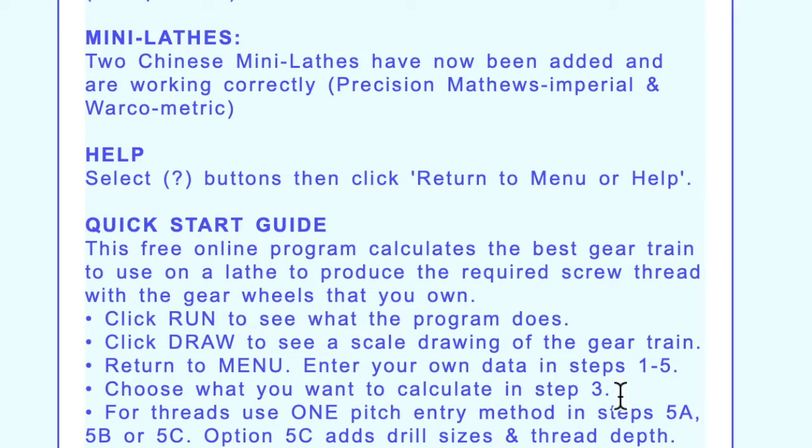We don't need to worry about much of what's on here, but we've got Contact Us, so if you ever need to contact me about anything, I'm right there. We've got a quick introduction here which includes a quick start guide, but let's scroll right on down to the menu itself—this is the main center point for the program.

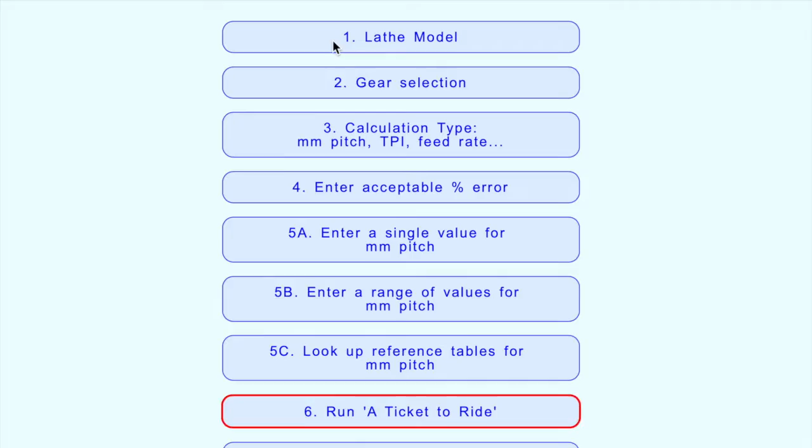We keep coming back to this point, and there's a series of steps you go through to enter the data first, and finally you get to step 6 down here and run the program. So the first thing you enter is the type of lathe you have, and we'll go through that, then you enter the gears that go with that lathe.

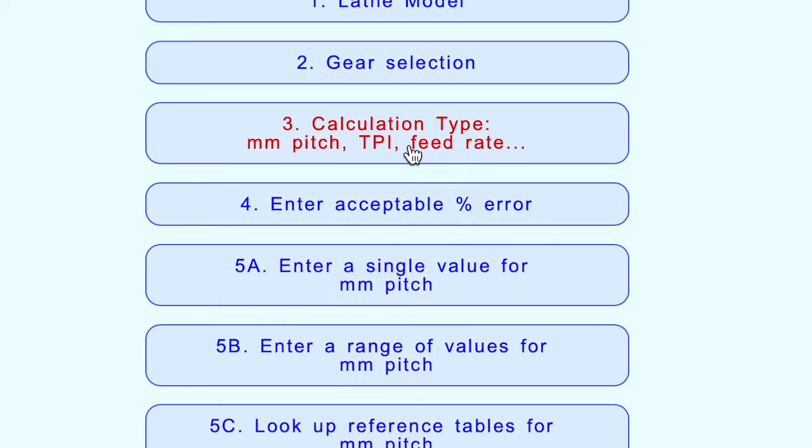That's all we're going to do in this tutorial. Then we'll have a second part where you go on and enter the type of calculation you want, whether you want a thread with millimeters pitch, threads per inch, calculated feed rate, or something like that. There's actually 8 different options on that list.

Then we come to enter the acceptable error—that's what we were just talking about, the error you're willing to accept. The next 3 steps, you only choose one of these 3, and it's really just one step, step 5. The first one is very straightforward: you just put in the pitch of the thread you want, and then you go straight to run.

An alternative is to request a range of threads and click run, and the third option is to look up a reference table to find out what pitch your thread has, and then go to run. So that's how the thing is basically structured.

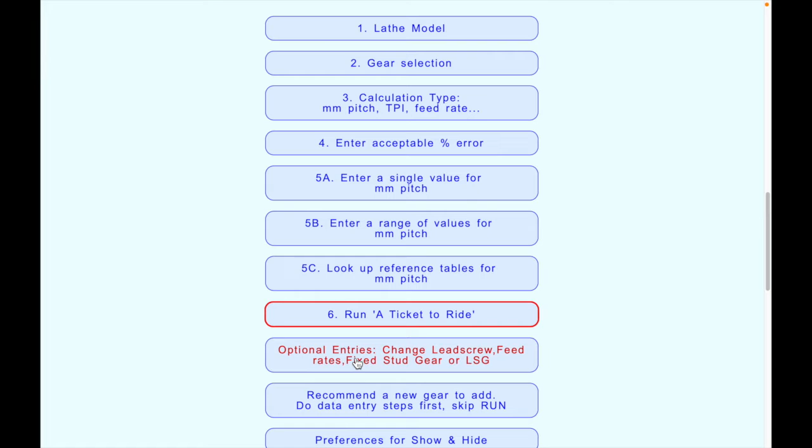We're going to be talking about mini-lathes, and they require some entries on this list here, and perhaps I should go through that during this episode to explain what special entries are required for the mini-lathe.

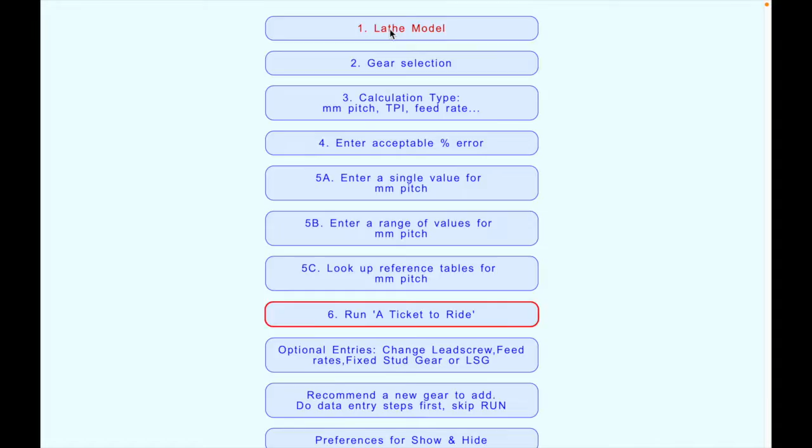So we'll start with entering the lathe model in step 1. Choose a lathe - we've got a long string, there's actually about 20 different lathes on here. But if you've got a lathe that has no gearbox, you might want to choose either an imperial or metric one with no gearbox, and we should be able to do any lathe of those types with no gearbox. But we're going to be talking specifically about mini lathes, and this is a particular mini lathe which does not have a gearbox. It's a Warco brand, a UK importer of a Chinese lathe, so we'll just select that.

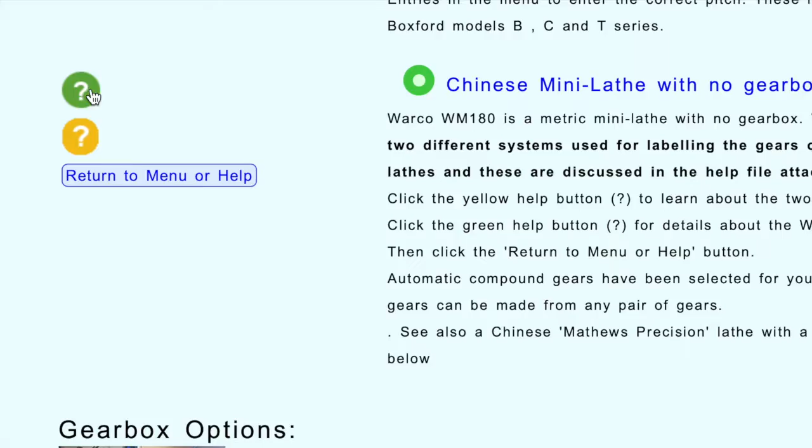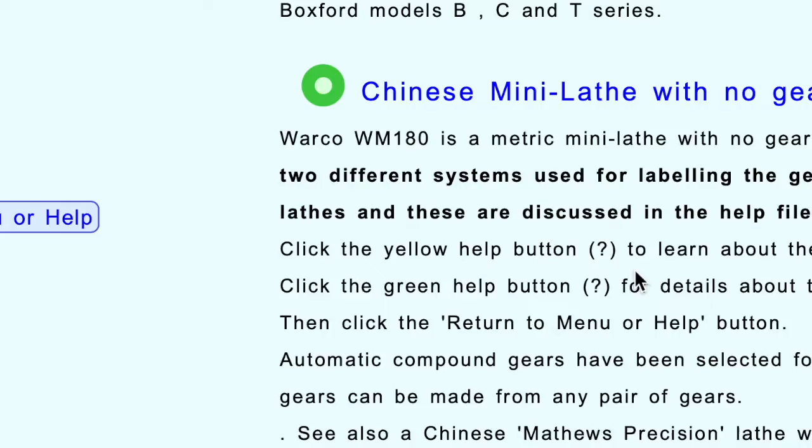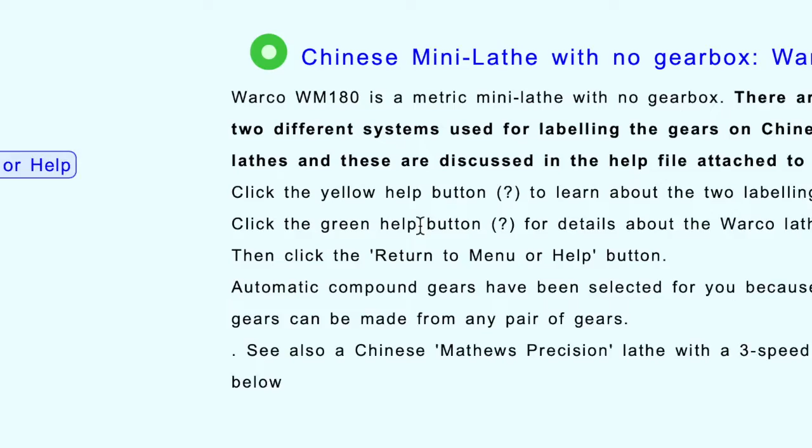And if we want to know more information about any step we go through, we can go to the help file over here on the left. Each entry has its own help paragraph in the help file, and we can go straight to it with this. This one actually has two different topics we can go to, and it says down here what the yellow one is for - it's to learn about the peculiar labeling systems that these lathes have on their gear trains. The other green one is the standard help file about that particular brand of lathe. Let's just click that to show you how the help works.

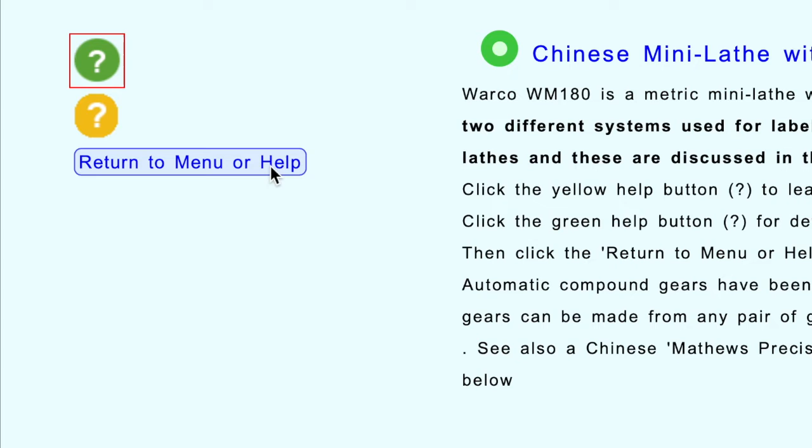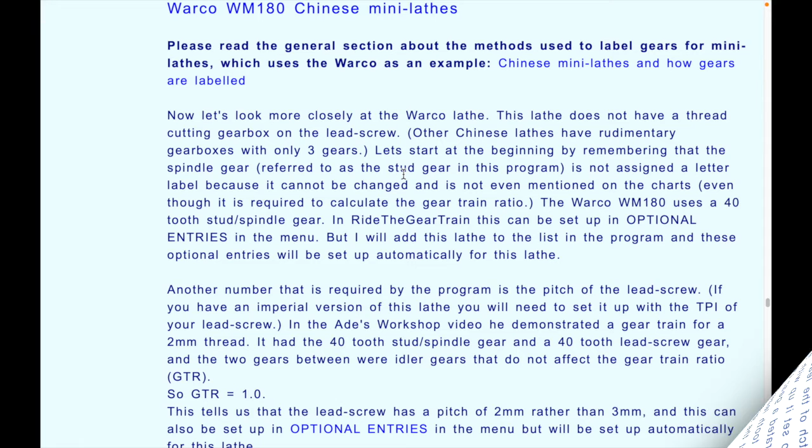Clicking it, nothing happens except a little red box appears. We also have to press return to menu or help, and that actually takes you to the help screen. When you get there, it's asking you to click again to go to the particular section you requested. So we had apparently requested to learn more about Warco mini lathes, metric version. The reason we have these 3 steps to go through is because when you go back to your program, it takes you back to the same point where you were entering data, and the data you enter is still there - so you haven't lost anything by going to the help file, and that's why we have to go through these 3 steps. So click that, and here we go, a paragraph about this particular type of lathe.

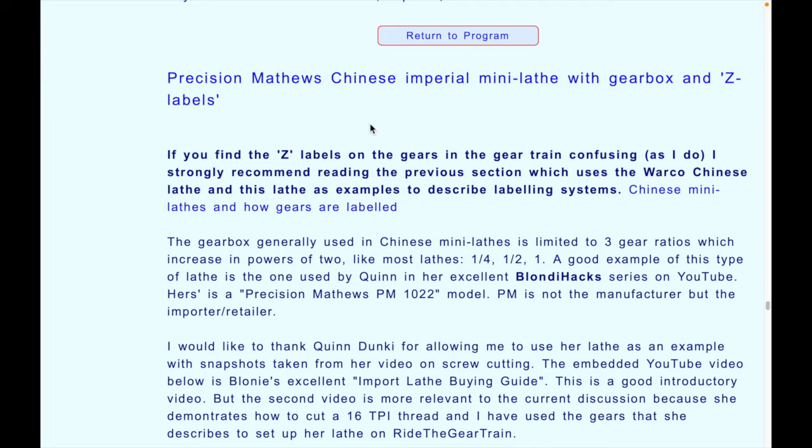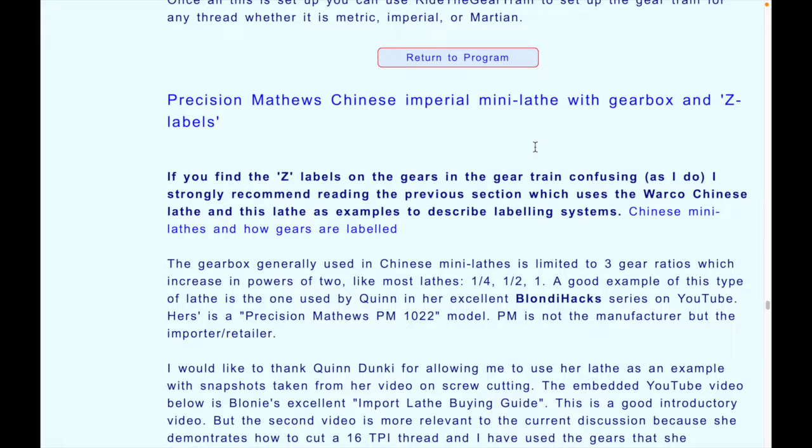I stress it is actually fairly important to look at this, I think, because of this lathe being somewhat different to other lathes. There's another mini lathe on here which we'll come to later, the Precision Mathews Chinese imperial mini lathe, and this one has a gearbox, and it also uses the peculiar Z labeling on the gear train. So we'll probably come back to that one later.

But in the meantime we've just read about feed rates and everything on the Warco lathe, and when we're finished we click return to program, and you'll see we're back exactly where we left off, so we haven't lost anything, and it's even selected our Chinese mini lathe with no gearbox.

Okay, once we've selected that, we can return to the menu again, and you don't have to scroll all the way to the bottom. We've got a return button on every line, and we're ready to enter some gears.

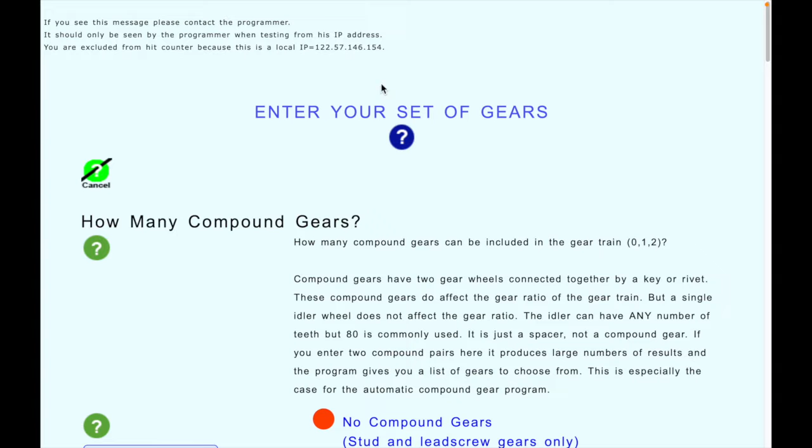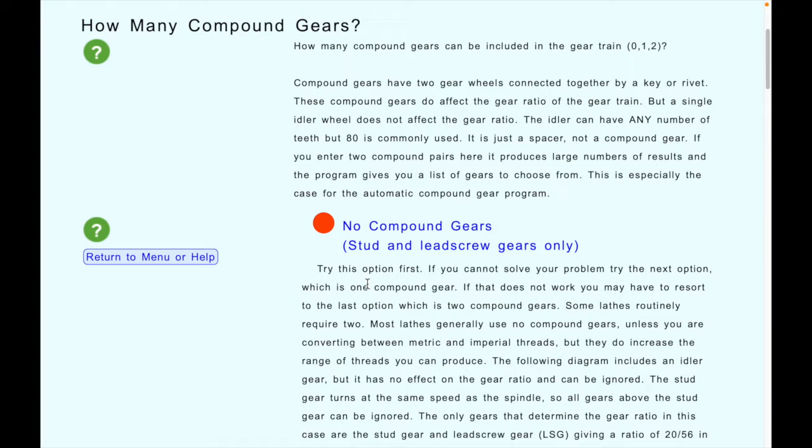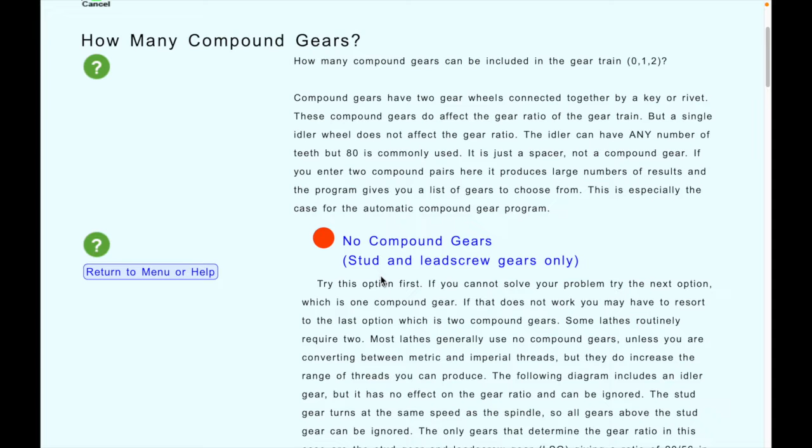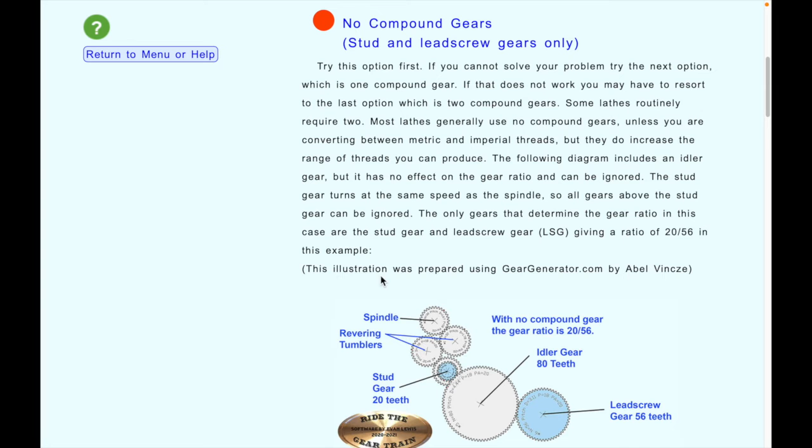It wants to know how many compound gears we're going to use. Now this particular type of lathe, you can't vary the stud gear, which on most conventional lathes you have at the top and can change - we'll talk about that some more later. But because this particular type of lathe doesn't have a changeable stud gear, and this one doesn't even have a gearbox either, we need to get quite a wide range of different gears from the gear train. And if we chose no compound gears, it really wouldn't give us enough selection. We need at least one compound gear in the train, and actually the standard gear trains shown on the tables for these lathes often just use one compound pair.

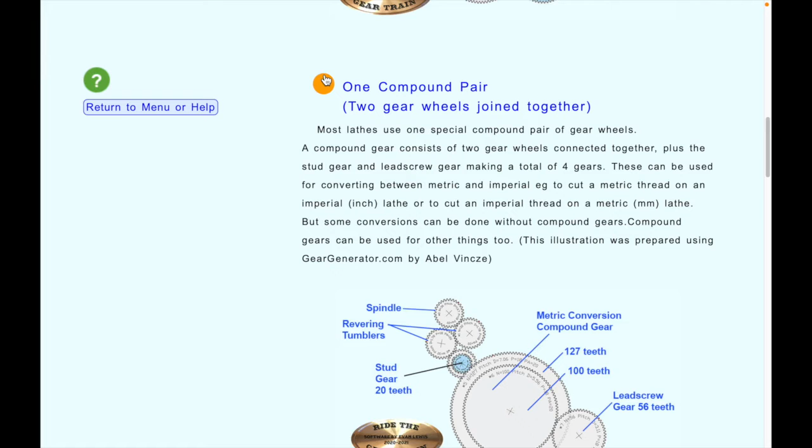I think I'll do that first because it's less complicated, but you can actually choose 2 compound gears, which gives you an even wider range of possible solutions. Or let's look at all 3 of these diagrams showing the gear trains.

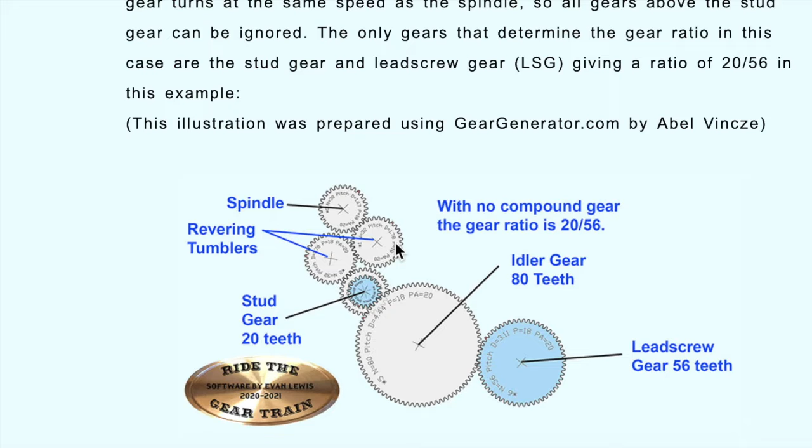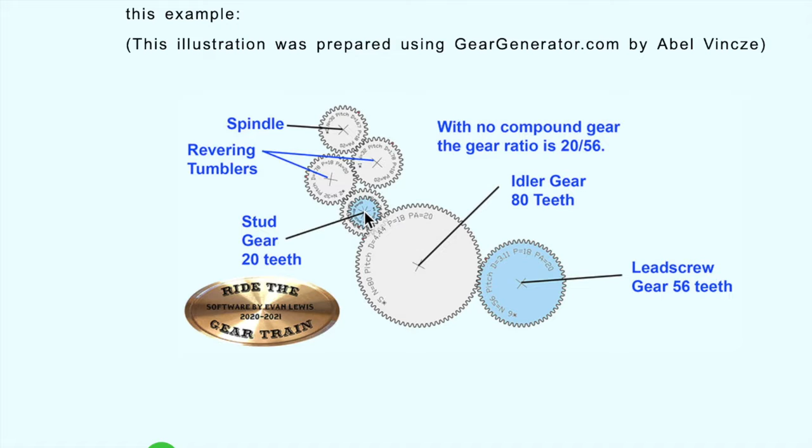This little cluster of 4 gears at the top - they don't actually affect the gear train ratio at all. They're just there to allow you to go into forward and reverse on these British type lathes. But the Chinese lathe doesn't have all that. It only has this one gear here, the blue one, and whereas that gear can be changed on British lathes, the Chinese lathe you can't change it. The simplest setup is to have an idler gear, which then just drives the lead screw gear. Now the idler gear, you'll need to remember, does nothing in terms of the gear train gear ratio.

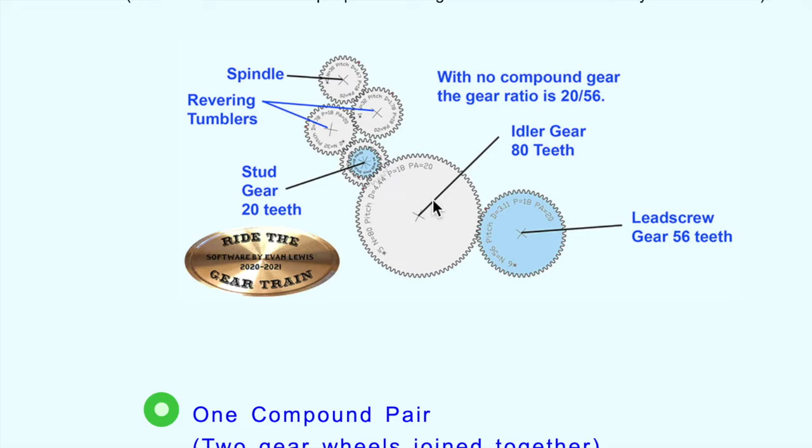The only thing it does is reverse the direction of rotation, and these lathes always have some kind of reversing mechanism on them anyway, so you can switch it over. As I say, this doesn't affect the gear train ratio, so it's just like having a 20-tooth gear driving a 56-tooth gear. And if you can't change that 20-tooth gear, that only leaves the lead screw gear that you can change, and it doesn't give you a very wide range of selection.

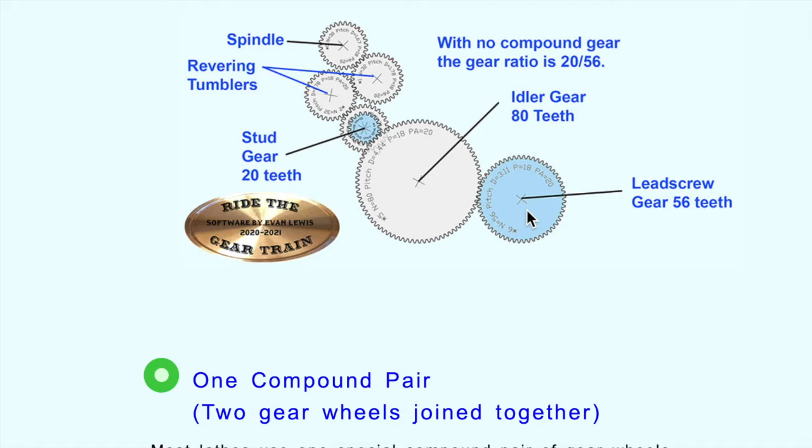So it's more usual to go to a system where you have at least one compound gear in the middle, and that'll give you most of the solutions you want.

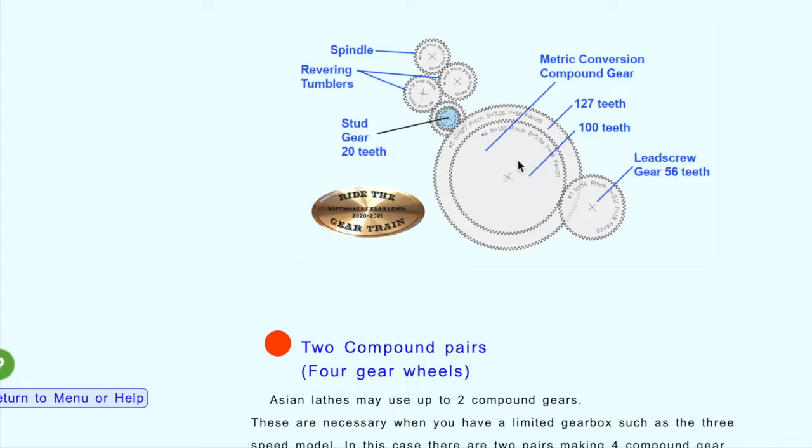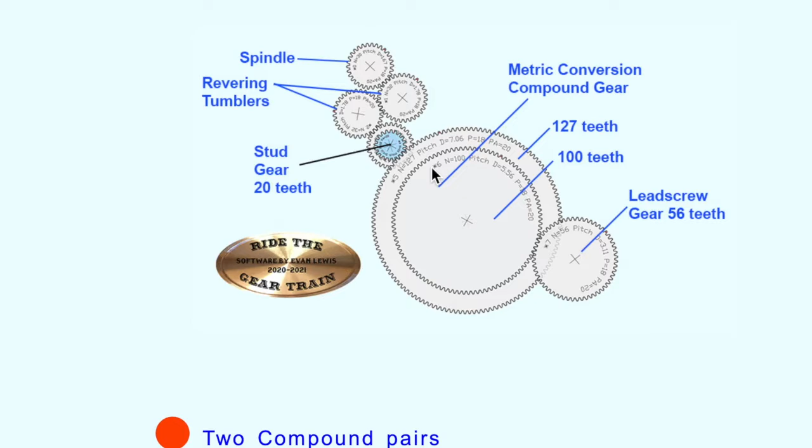So in this diagram we have two gears that are joined together on a key, so they turn around together. Sometimes they're actually riveted together, but not on the Chinese lathes, because on the Chinese lathes you can use any of the gears you're provided, put them together in any way you like, and mix and match. I call it mixing and matching, where you use any gear in any position along the gear train. You're not restricted like you are on some of the British lathes.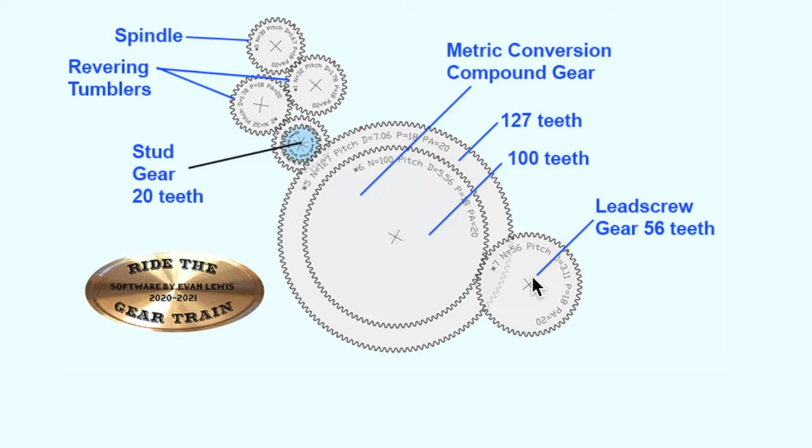So in this case we have the stud gear, which again cannot be changed. It's set on 20 teeth in this case, and it's driving, at this point here, the 127 tooth compound gear, which is physically connected to another gear which has 100 teeth, and the 100 tooth gear is connected here to the lead screw and causing it to turn around. So we have now 1, 2, 3 gears that can be changed to produce a wide range of threads. And so that's what we're specifying here when we click one of these buttons, 1 or 2 compound gears.

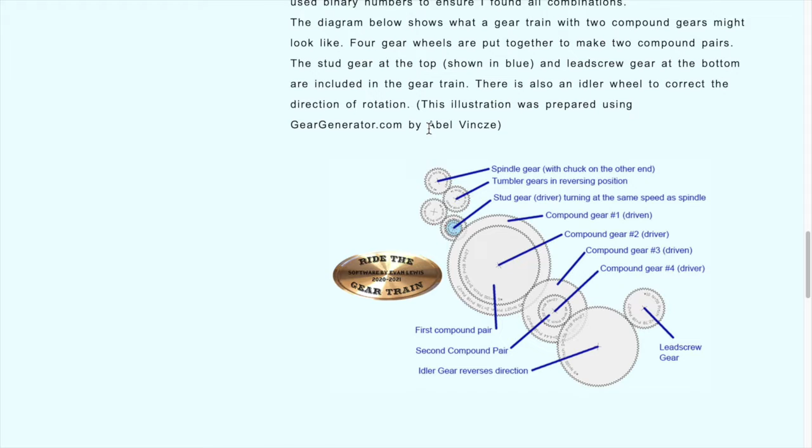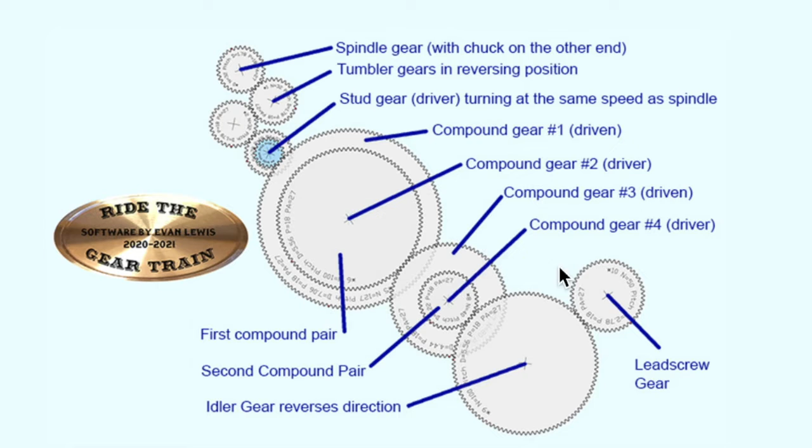This is the version with 2 compound gears. Same kind of setup, except that you've got one pair of gears here driving another pair of gears, which then drives an idler, which does nothing, and then through to the lead screw gear. So it looks quite complicated, but on the Chinese lathes you don't have this cluster of 4 gears at the top, and you just have these 2 compound gears connected together as pairs, and they have keys that connect them together, so they turn together. So this pair turns together, and that pair's another set, and it turns on its own shaft. And this gear is just in here to make it easier to connect this gear to that gear, so otherwise it wouldn't be necessary.

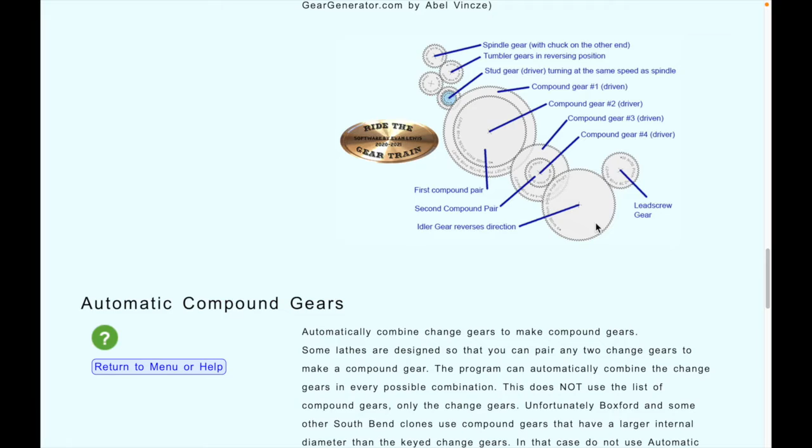So that's 2 compound gears, and we decided we'd choose 1 compound gear. Let's make sure I did that. 1 compound gear, checked. It's green. Green means it's selected, with a little dot in the middle for those who are colorblind.

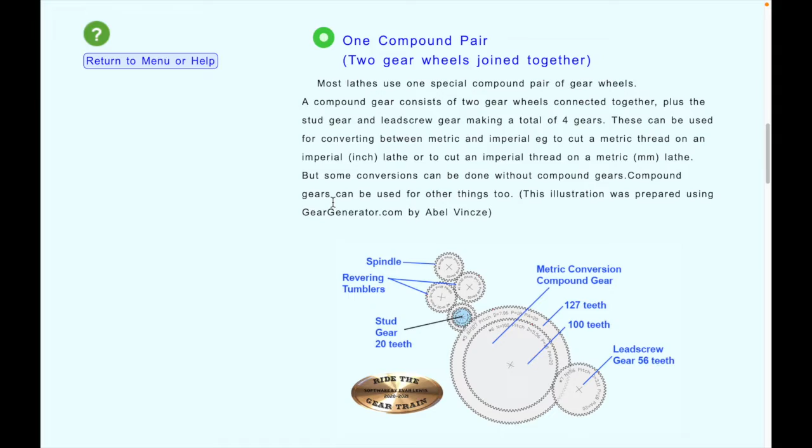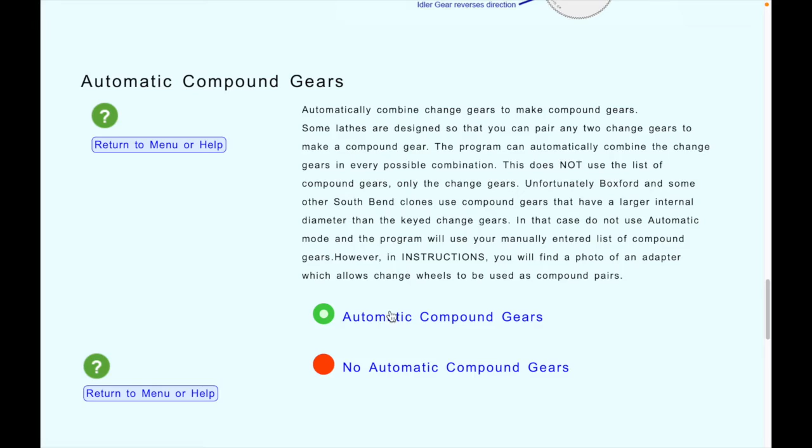As I was saying, in Chinese lathes you can use any gear in any position, so they can be mixed together in any way you like. And if you choose automatic compound, which is normally what we do, it automatically goes through and works out all the different ways you can put those gears together. It's only certain British lathes and American lathes that can't do that, and you have to use a manual system. Finally, you can enter your own list of gears.

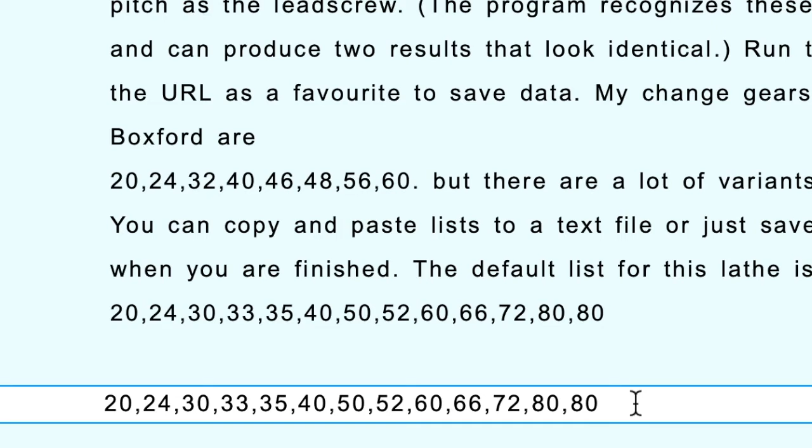And because the mini-lathes don't have a very good gearbox, they tend to give you quite a long list of gears. And these can be put together in any way along the gear train. Have a look at this list and check that it's the same as what you've got. It may not be, so you can edit this list. You can say, oh, I don't have a 24 tooth gear, so you can just take it out. And so that's gone from the list, and it won't try to use 24.

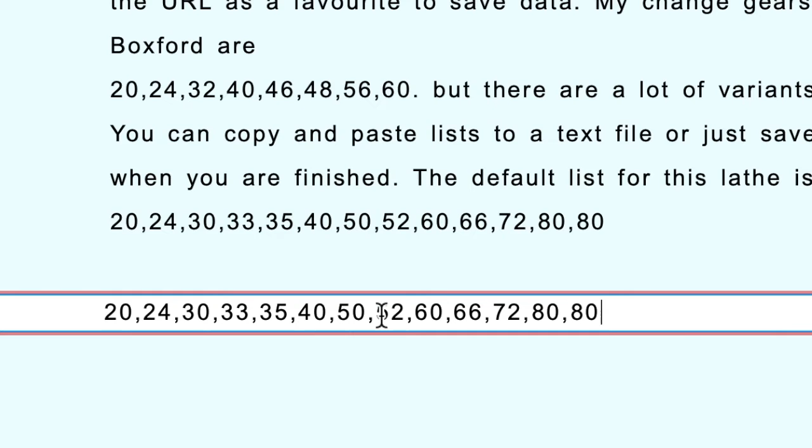If you've got a completely different list, you can just erase the whole lot and type in your own list, or you can delete that and just get one of the standard lists from here, copy and paste. And since you can do that, you can also set up your own file if you want to, just to keep a record of your list of gears. You can put that in a text file and just bring it in whenever you want.

However, that's not really necessary, because this list is actually recorded in the URL for the program. Actually all of the data that we enter here is stored in the URL. It has 100 variables in there, and if you save the web address, the URL, it'll save all your data as well. So if you use that as a favorite or bookmark and click on it next time and come back to the program, you'll find that all your data is there again, because you used this particular personal URL.

There's a list of compound gears, but because we're using automatic mode to make up our compound gears, we don't need to use that. With the Chinese mini-lathes, you do not use a separate list of compound gears, and it's just left empty here. If there's anything written in there, it doesn't matter, it won't get used.

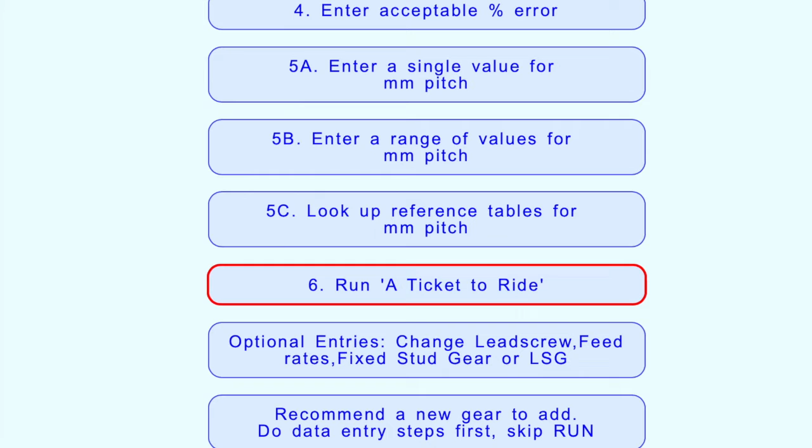We've done that. We can now return to the menu, and there's another item we need to look at specific to the Chinese lathe, and that is optional entries. This is already set up for you. If you chose a mini-lathe to begin with, this will have been inserted into the data within the program, so everything should be okay here.

The first item just specifies how many results you're prepared to look at. Do you want to look at the 2,000 different options? You could actually reduce that if you wish. The program will stop after that limit.

Some lathes have power feed on the carriage and others have it on the cross slide as well. If you're using the lead screw to drive the carriage along, then there's no special gear ratio here, and this is just set to 1. But some lathes do have a gear in the carriage which slows down its movement when you're using power feed, so that you get a nice fine cut. Most more sophisticated lathes do have a gear in there, and often this ratio, instead of being 1, will be 0.3. I've assumed that the basic mini lathe doesn't have that feature and simply uses the lead screw to drive the carriage along, and in that case the ratio is just 1.

The other ratio here, if you look at the icon, it's got an arrow going across the cross slide, so that's for power feed going across the lathe on the cross slide, and it's also set to 1, but it could be a different ratio.

Now this is something about the Chinese mini lathes. This shows the stud gear that cannot be changed. Remember, the previous diagram we looked at had a cluster of 4 gears in here. They are no longer present because we're looking at the Chinese lathe, which has just 1 gear. The problem is that this gear is actually machined into the end of the spindle shaft. On the other end of the spindle shaft we have the chuck. On this end at the back of the gear train, the shaft comes through here and it's got these teeth machined onto it, so that's why they can't be changed.

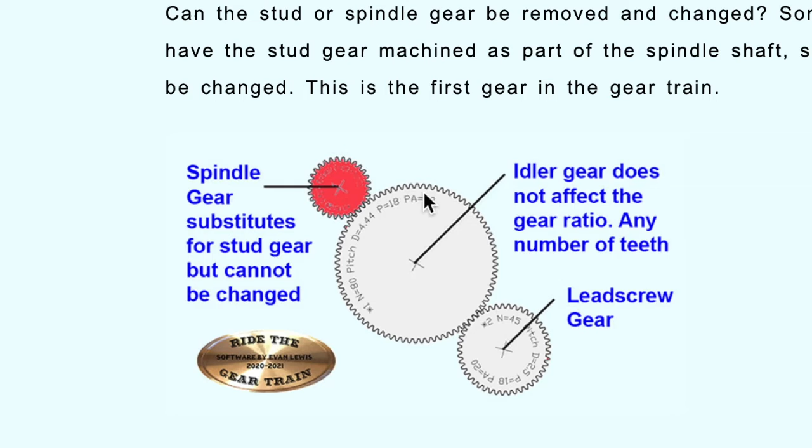So that can drive a single gear, as we looked at previously, which drives the lead screw. We just have to tell the computer program that that gear cannot be changed. It is shown in red here for that reason, and we have answered no here. No, it cannot be changed. You can go back and change these settings, but that's appropriate for your Chinese mini lathe.

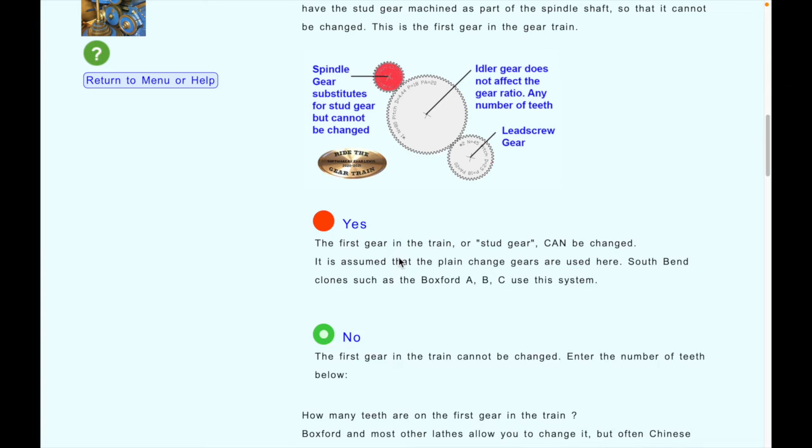Now we have to actually tell it, well, how many teeth does that gear have? We're not going to change it, so let's put in now that it has 40 teeth. I have seen others that have maybe 55 teeth, especially if they have a very large hole through the center of the spindle.

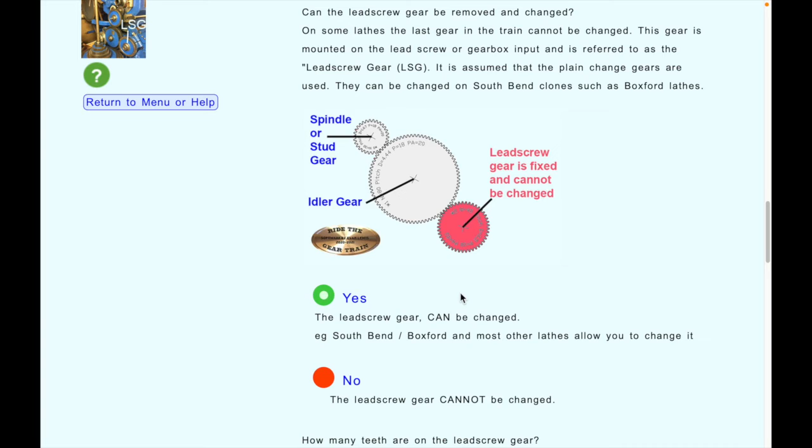There are some lathes, and not necessarily Chinese ones, where the lead screw gear can't be changed. On the other end of the gear is either the lead screw itself or the lead screw gearbox. Because it's incorporated in the gearbox, sometimes it cannot be changed. However, on the Chinese mini lathes, they generally can be changed. So I said yes, it can be changed here. So although we've got a box here with a number in it, it doesn't need to use that because we can vary it.

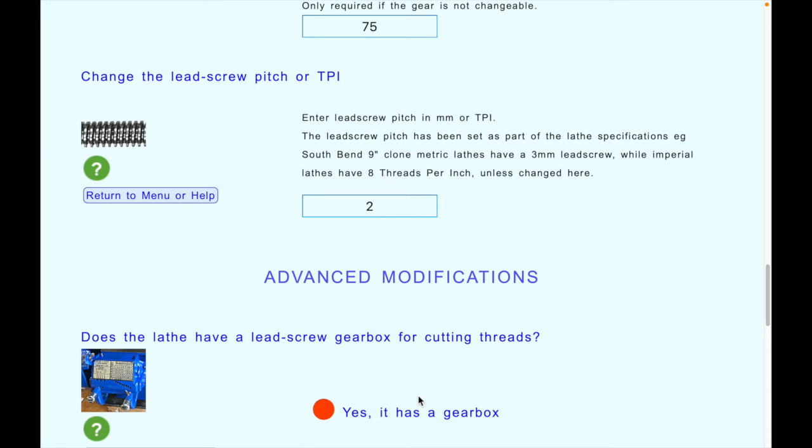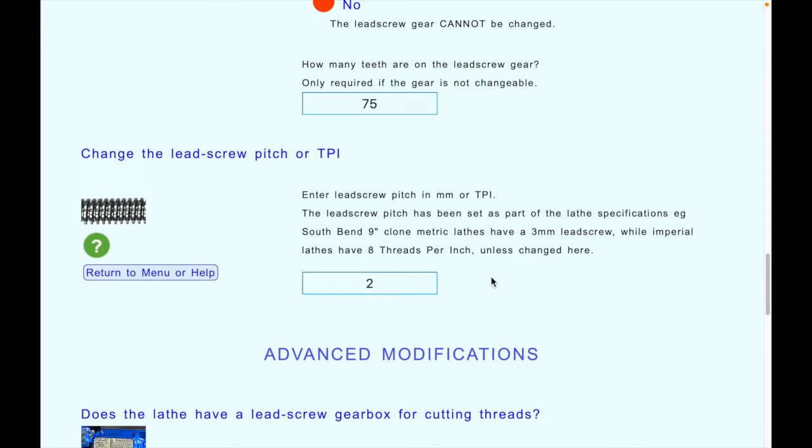This is something you might need to know about, because the Chinese mini lathes usually have a 1.5 millimeter pitch on the lead screw, and some have 2 millimeters pitch. If you're using an imperial lathe, it'll be different again - it may be 16 threads per inch. This should be set up for your particular lathe, but if your lathe is different, and especially if you seem to be getting some strange results, you may need to come to this section called optional entries and check that the pitch of the lead screw has been set correctly for your lathe.

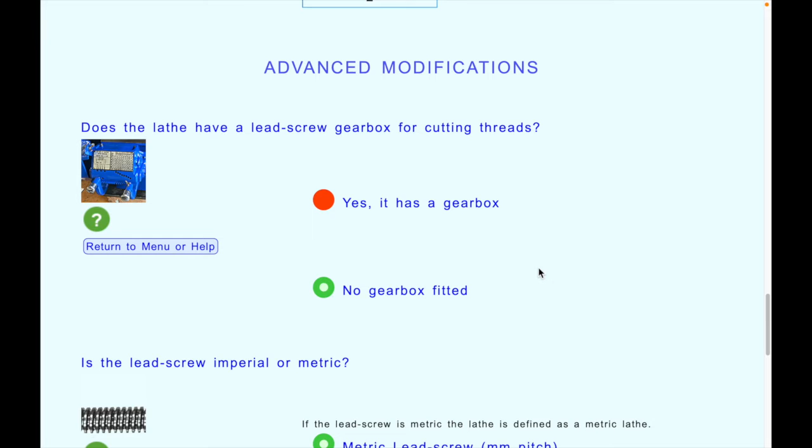Beyond that, there are some advanced modifications which you won't need to get into. This is used by people who have some peculiar lathe which is not mentioned on our menu, and they want to get an existing lathe and do some minor modifications to it, but I don't think we need to get into that.

We haven't looked at a Chinese lathe with a gearbox, so let's go and have a look at our lathe selection again.

Last time we chose this one, the Chinese mini lathe with no gearbox, made by Warco.

Below that, in the gearbox section, we have another Chinese lathe, this one here, mini lathe by Precision Matthews. That's the lathe used by Quinn Dunki in her BlondiHacks series, and if you haven't seen her videos, it's well worth watching them. She kindly gave me permission to take some snapshots from her videos to show here. So we'll select that, and perhaps we'll also have a quick look at the help file there.

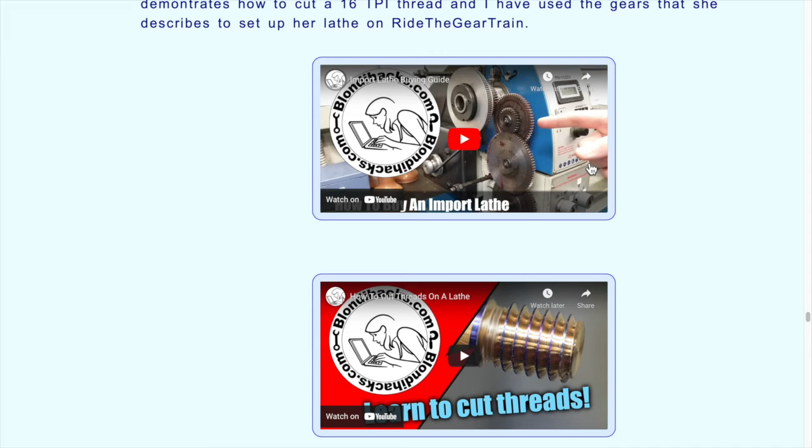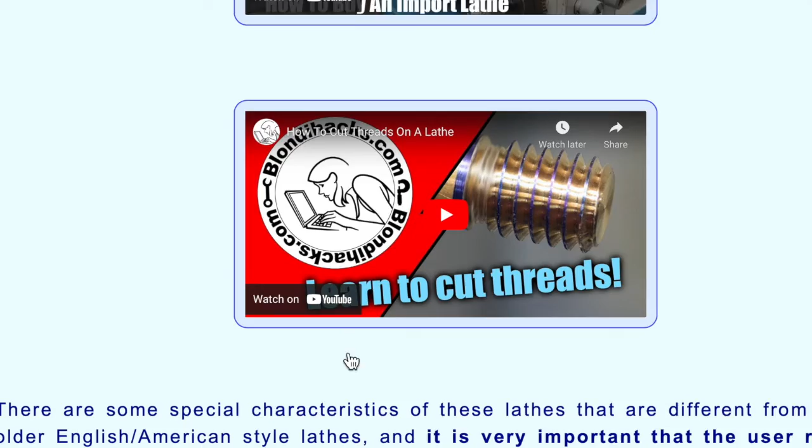There's quite a lot to read. Here are the links to her videos. This is about buying an imported lathe - very good production. And another one that's excellent to watch is how to cut a thread on a lathe. So if you haven't had any experience doing that, it would be well worth watching.

I also have my own video about cutting threads as well. My lathe has a variable speed motor, which I think a lot of Chinese mini lathes have too, and that's very handy for slowing down as you approach the end of the thread.

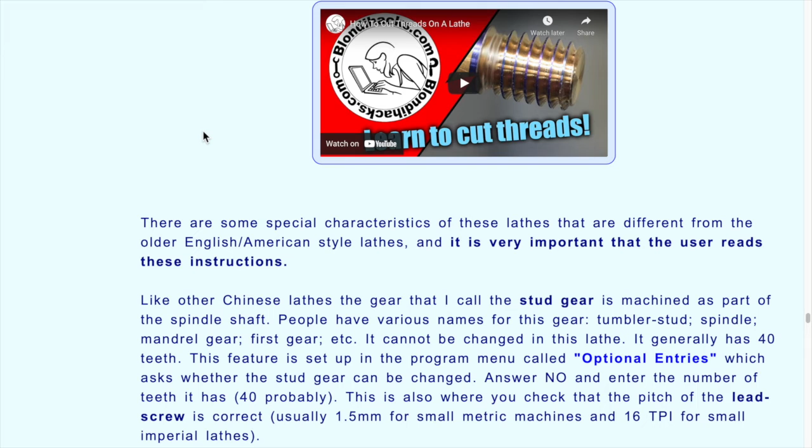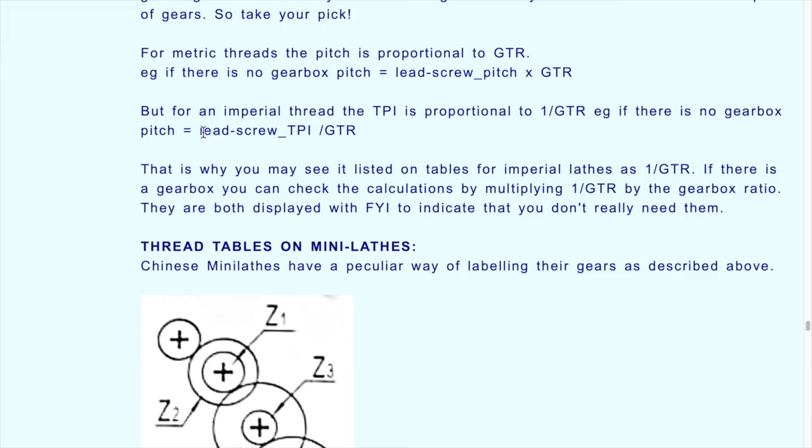The main reason that I stress the importance of reading through these instructions is that the labeling system for these lathes is rather peculiar, and I think this is the system that's used on most of these imported lathes. They label the gears Z1, Z2, Z3, Z4 and L, and at first glance it looks fine, but it turns out that they don't label them in the order that power is transmitted through the gear train, so there's no correlation with gear ratios with this numbering system.

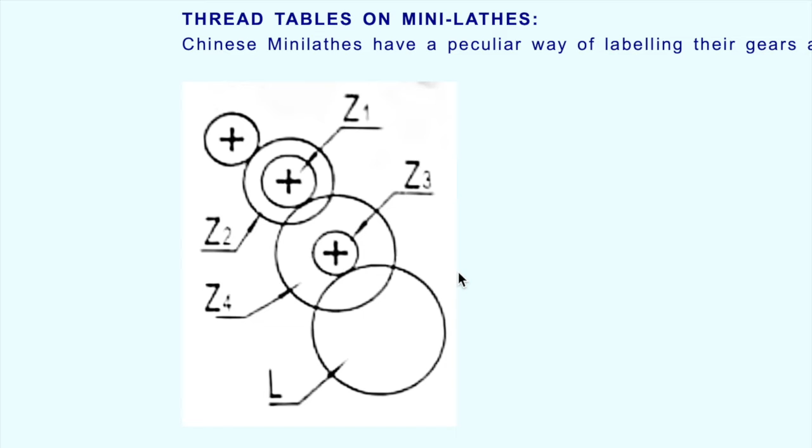They're actually labeled according to the way you put them on the little stud shafts, and these can vary in their order of rotation. So I think it's best just to skip and forget about this labeling system when using my computer program. When using the program, it labels the gears as compound gear 1 and compound gear 2, and this pair is 3 and 4, and this is the lead screw gear. As we said previously, this gear is fixed and cannot be changed, but is usually 40.

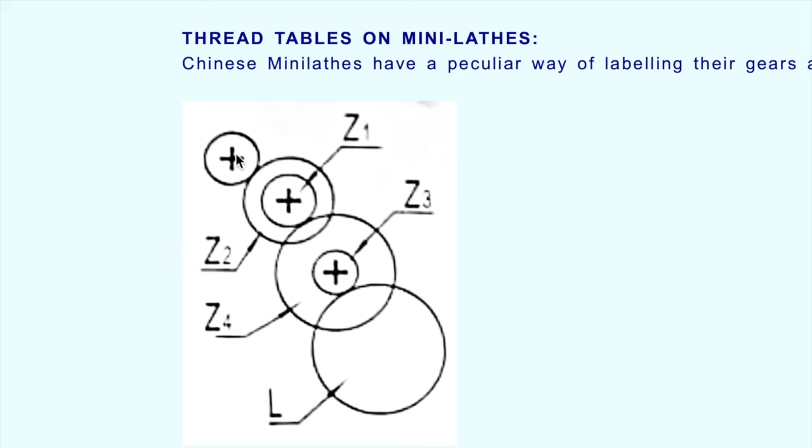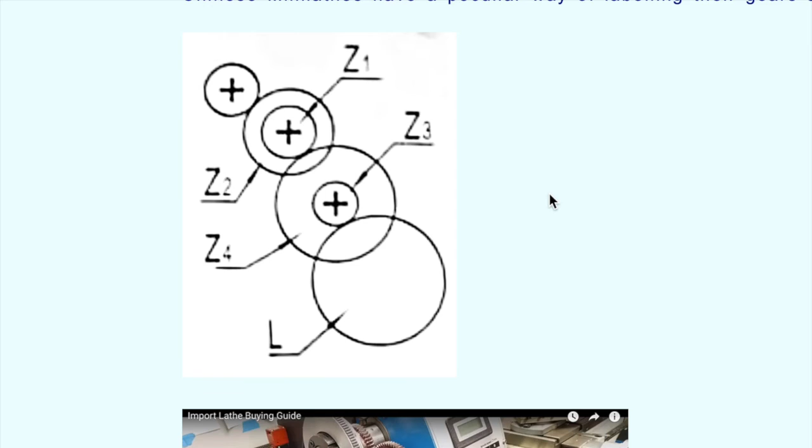So I talk here quite a lot about this complicated labeling system that is used, but I would recommend actually just forgetting about all that and just using the labeling system that I use in the program, because we're not going to be using the specific tables that they use on the front of the lathe.

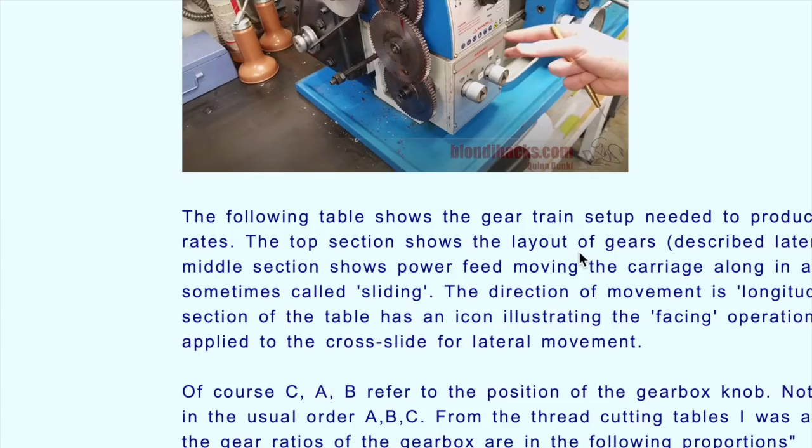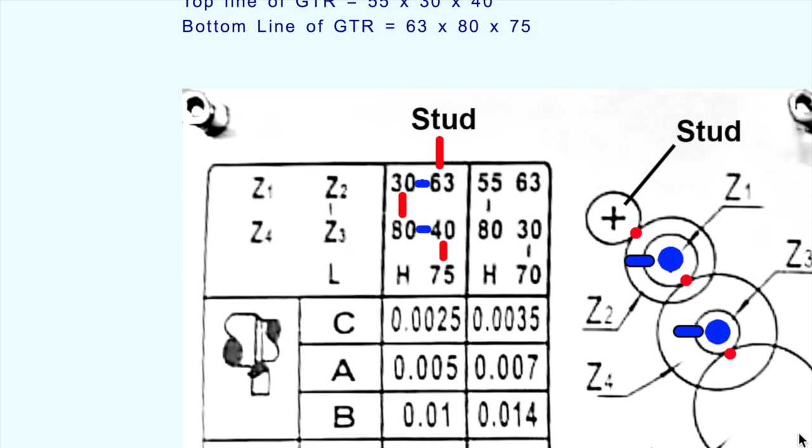So that's how their system works, but we'll just call these compound 1, 2 and 3, 4 in the order that the power actually transmits through the gear train. When we're finished, we can click the return to program button, and we'll do something a little different with this lathe.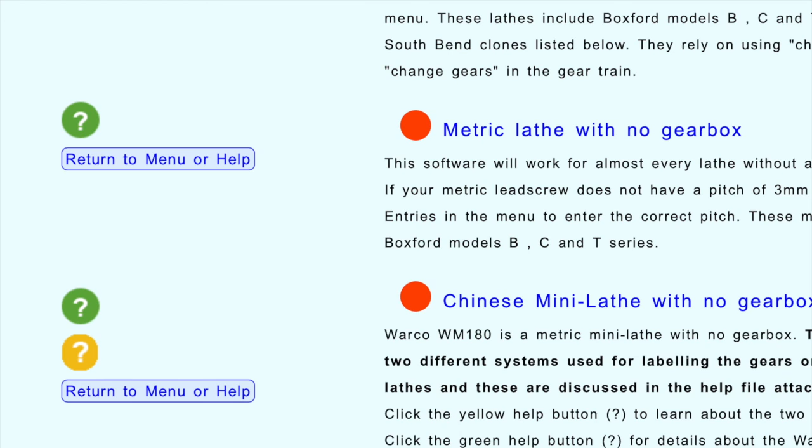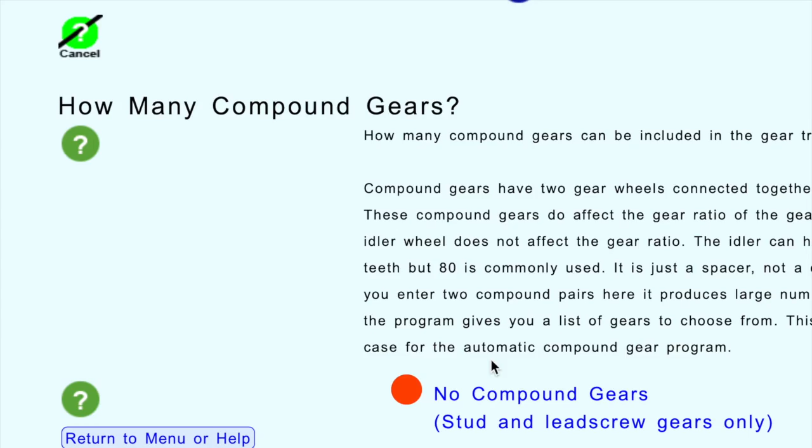We're going to use 2 compound gears. So I'll go back to the main menu and go to the gear selection section, and that's where we choose whether you have no compound gears, 1 compound gear, or 2 compound gears. It's already selected actually. Then we'd be ready to run, and we'll do that in the next section.

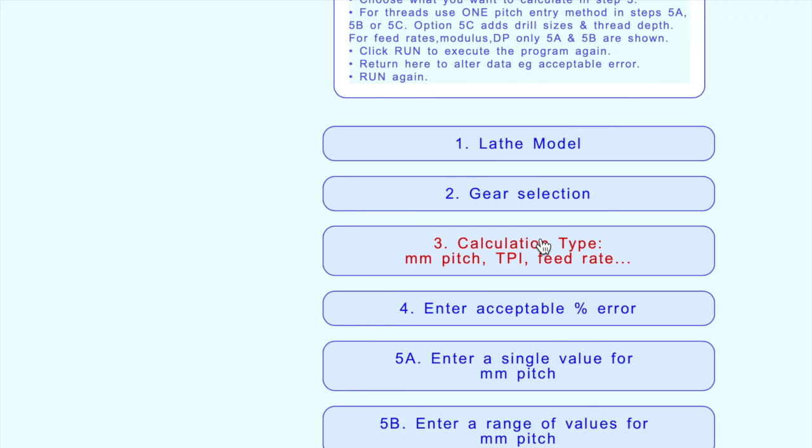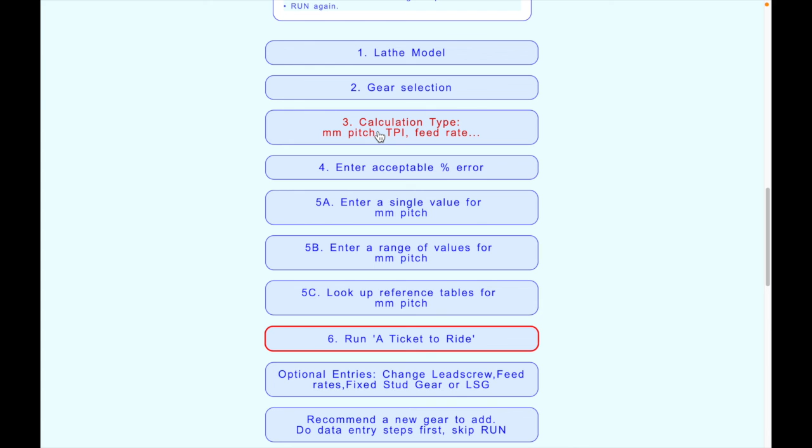Okay, so I think we're finished this part of the process of going through basically steps 1 and steps 2. The rest of the steps are the same for everybody, so I'll make a separate instructional video for that part. Thanks for watching.